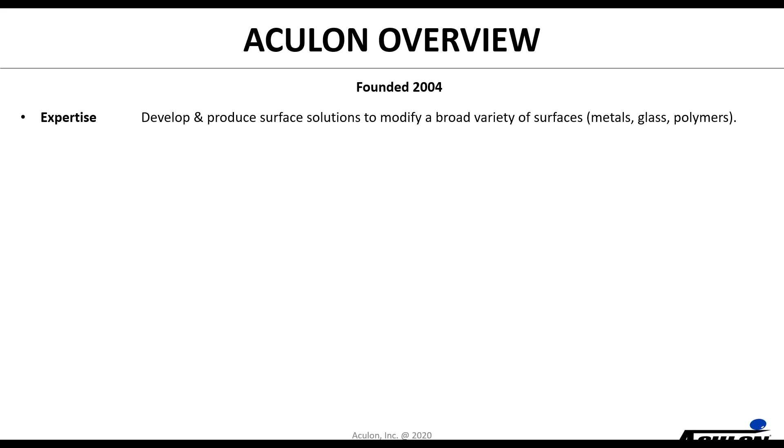We are a surface modification company working in a broad variety of fields: electronics, consumer products, medical devices, oil and gas applications. We were founded in 2004, and what we do is develop and produce solutions that modify a broad variety of surfaces - metals, glass, polymers - functionalizing those surfaces with different functionalities depending on what the customer is looking to do.

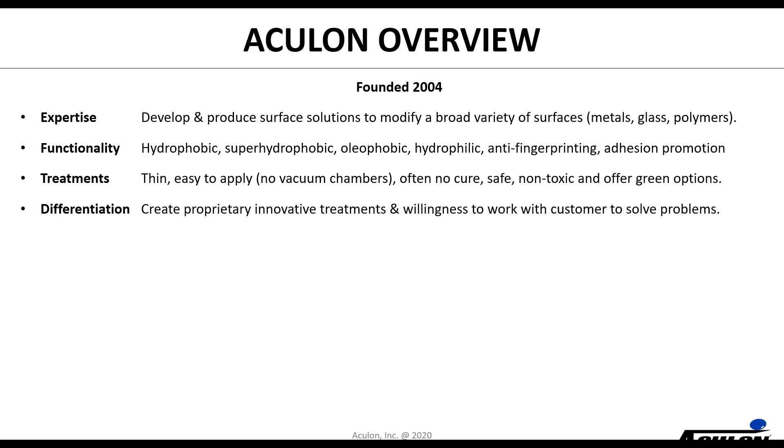Our treatments are all easy to apply. They're not done in vacuum deposition chambers, often no cure is required, they're safe, non-toxic, and we offer a number of green options. We differentiate ourselves from larger specialty chemical or coating companies by providing innovative treatments and working with customers to solve problems.

We have three divisions: electronics - we'll talk about one particular product in that today - oil and gas, and specialty markets including the medical area. Our business model is to produce chemistry; we do some treatment of parts, but we don't treat people's stencils except in a test methodology or testing environment. So in this case, we provide the chemistry to either stencil houses or directly to the users.

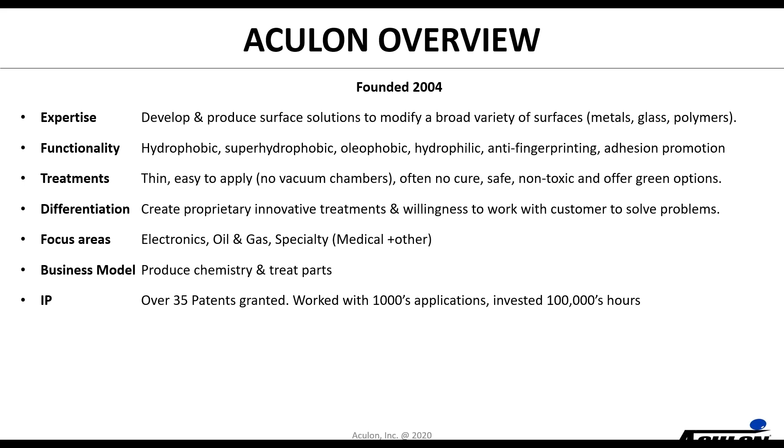We've got over 35 patents, worked on thousands of applications, invested hundreds of thousands of hours learning how to be experts in surface modification. We have over 100 products. Our people are smart - numerous chemists with PhDs, master's degrees, electrical engineers, mechanical engineers. We're based in San Diego, California, where we do our lab and development work as well as manufacturing, and we have offices around the world.

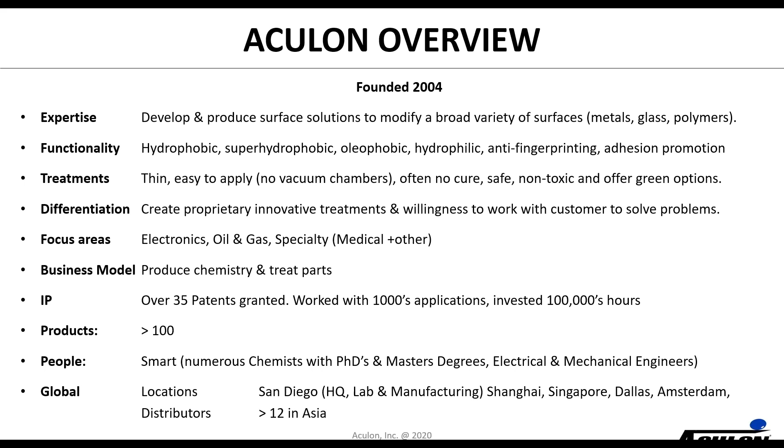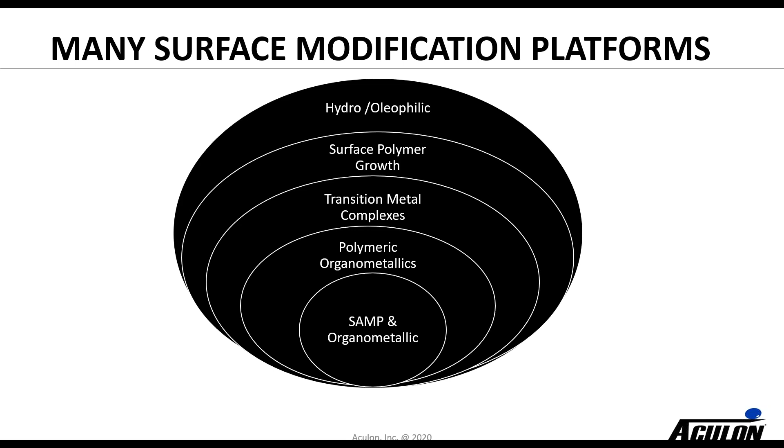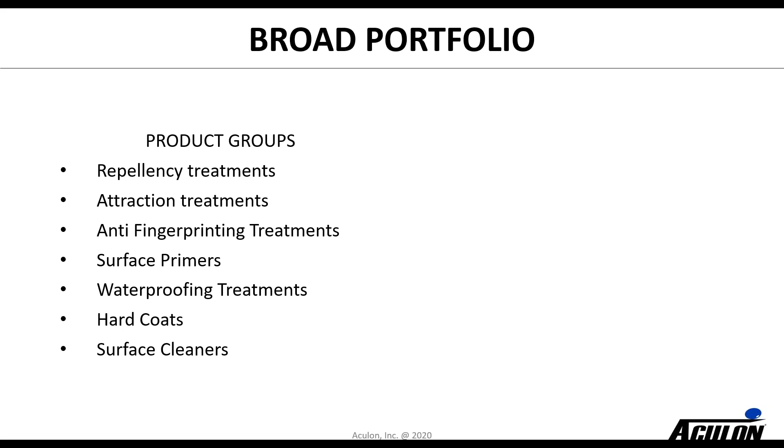As a company, we started using the technology we use on NanoClear stencils, which is a self-assembled monolayer with phosphonates, and we've built a series of additional technologies around that, giving us a broad suite of products used in a variety of industries, delivering a variety of functionalities.

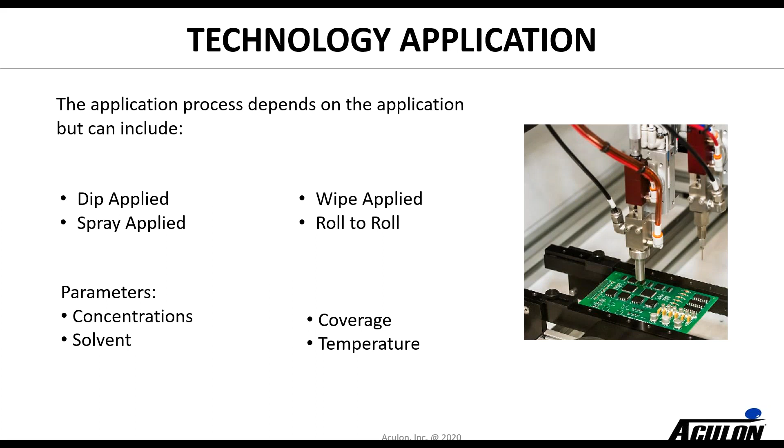From a technology standpoint, most of these are easy to apply. Some can be dipped or sprayed, or in the case of the stencil treatment, it's wiped on. We do roll-to-roll coating, and we can modify the parameters to optimize the treatment formulation. Everything we do relates to surface modification.

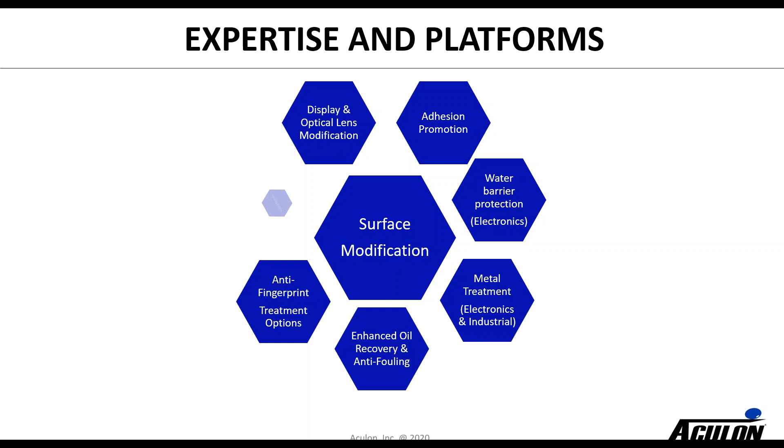We started as a nanoscale treatment company, and we've built a series of expertise and platforms into this marketplace. Today we're going to be talking about the metal treatment marketplace and electronics in particular.

As I say, we're organized by 3 businesses, and we have a number of things in the electronic space. NanoClear, which is our number 1 global stencil coating technology. NanoProof, where we treat a variety of printed circuit boards, provide moisture barriers and other benefits for keeping water away from circuitry. We have a business creating epoxy control, where we keep epoxy away from parts and components. It can be on semiconductor packaging, or it can be on lead frames. And then we do a lot in the anti-fingerprinting area, where we treat surfaces for laptops, tablets and smartphones, to reduce the visibility of fingerprints. And then we're doing some in semiconductor test pins.

So let's now talk about Stencil NanoCoatings. What are they? They're extremely thin, flux repellent films that are applied to the bottom side of the stencil and to the aperture walls. In doing so, you get an improvement in the quality of the print, better yields, better transfer effectiveness, and you boost the productivity of the line because you're spending less time under wiping. You'll see a dramatic improvement in the number of prints per cycle to each wipe. It's less downtime for paper changes as you're using less of that.

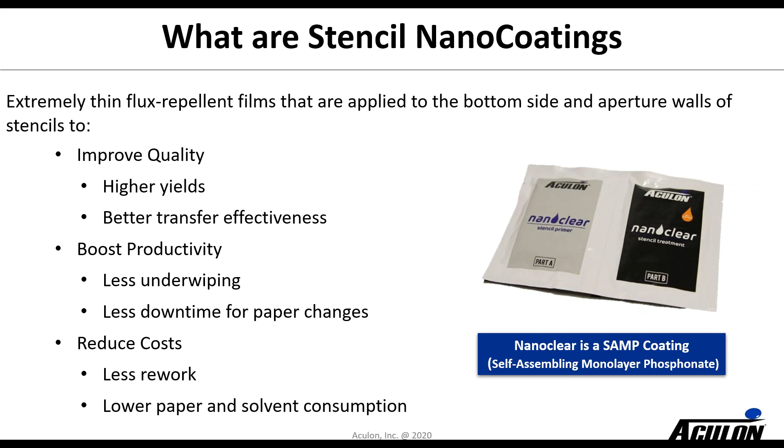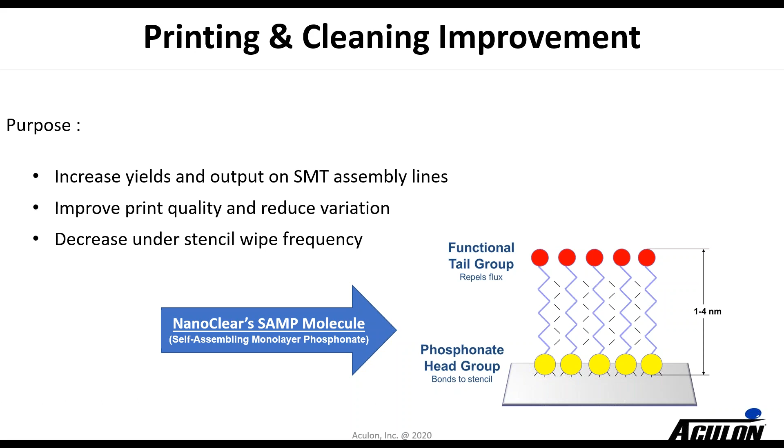As a result, you've got less rework and lower consumables, so you basically reduce the cost. What we do has been demonstrated to increase yields and output on SMT lines. It's a very straightforward technology that's cheap, works every time, and has been very reliable for us. We'll show you a couple of examples with QFNs.

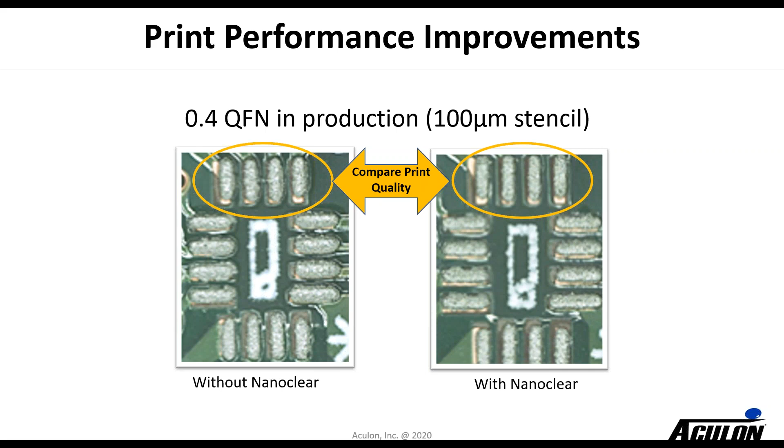Here's an example where on the left-hand side, you can see the QFN that hadn't had NanoClear applied to the stencil. You can see there's a little bit of slumping and connecting between the two deposits. Whereas on the right-hand side, where NanoClear was used, you've got nice crisp deposits. And obviously, that's what you're looking to do.

Here's another example from a 0.5 millimeter QFN. Again, on the right-hand side, you can see much crisper looking shapes and deposits. In this case, you'll see below that what we've done is extend the print cycle from basically 3 prints to now 5 prints, and that's a wet-dry wipe system. If you're doing the wet-dry vac wipe system, it went from 6 to 10 prints. So obviously, you're getting a significant amount of improvement in throughput because you've got less downtime and better quality in your printing process.

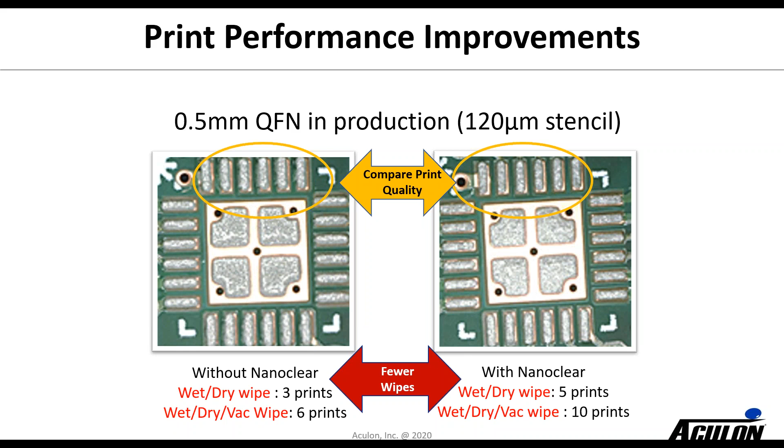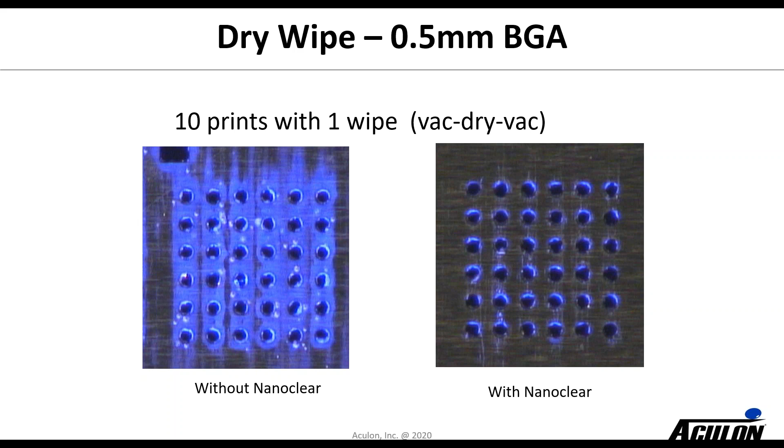To try to physically demonstrate what's going on, we added a UV tracer into the flux. You can see without NanoClear, it's being smeared around the bottom side of the stencil quite significantly, with a lot of it there. Whereas with NanoClear on the right-hand side, very little flux is getting transferred. So you're getting cleaner, better prints, and in this case, this was 10 prints to 1 wipe cycle. This technology has been in the marketplace for a number of years, and we've got many significant and sizable users out there that demonstrate and use it.

It's been well respected. It's won numerous awards, and it's had numerous cover stories written about it, and it's very efficient from a cost standpoint. Maybe Mario, if you'd like to walk us through this cost and savings payback calculator, that would be helpful.

Thank you, Edward. That was a great introduction. So we have on our website a simple calculator that you can use. It's downloadable, or you can work directly on our website. We'll include links and a downloadable file where you can enter in your exact information. Edward, if you can move to the next slide.

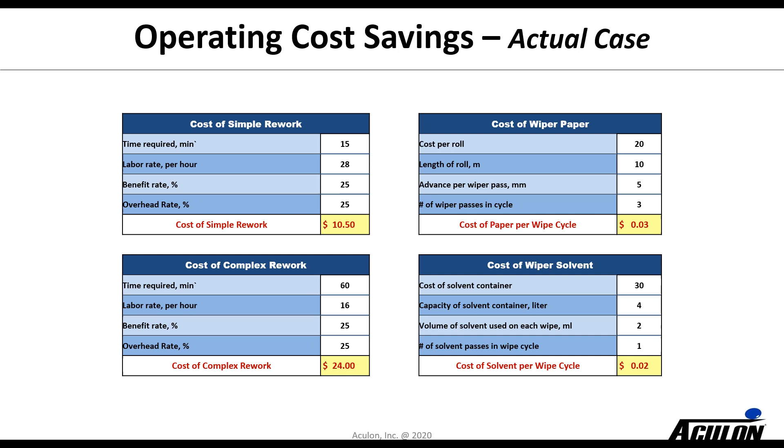There are sections where you can put in the cost of simple rework. You can insert your cost of wiper paper, the cost of complex rework, the cost of your wiper solvent. You can adjust all of these inputs, the costs, the usage, your labor rates, et cetera, and then put in estimations for changes after using the NanoClear, and it'll pop out what the changes, savings and improvements will be.

On this slide here, we have an actual case. This is from a customer that implemented NanoClear across their production line, and this is the calculator after they entered the before and after metrics. So these are not estimates, these are actual numbers.

So they calculated their improvement in defects, the improvement in wipe frequency, and the reduction in simple and complex rework. This gave them a set of information where they got back the payback after the number of prints to get payback on the cost of the NanoClear, which they determined was 43 prints, and the NanoClear had essentially paid for itself.

This gave them a number that at the end of the year from implementing NanoClear across their line, including the cost of purchasing the NanoClear, they saved $395,000, added 52 hours of additional uptime, and an additional 4,680 PCBs assembled per year. So that's real impressive, and this tool is available to you as well.

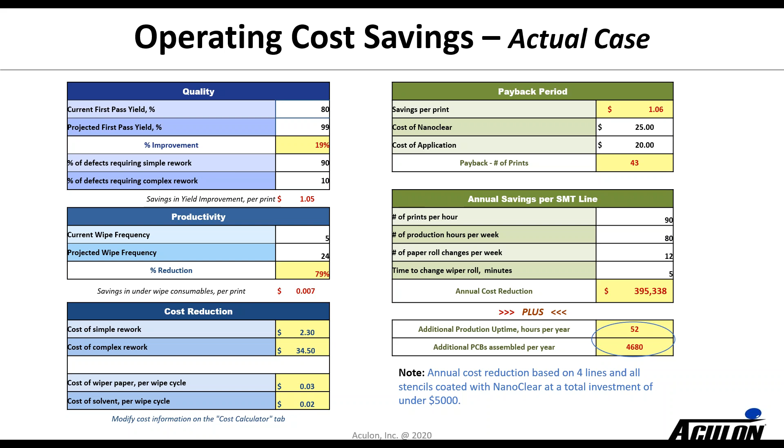So on to the next page.

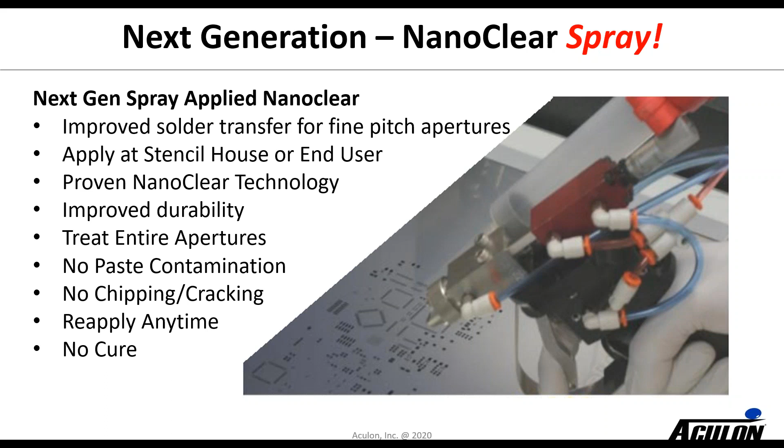You can even mix and match. You could take a NanoClear spray stencil and apply a NanoClear wipe after the fact if you needed to treat that stencil again.

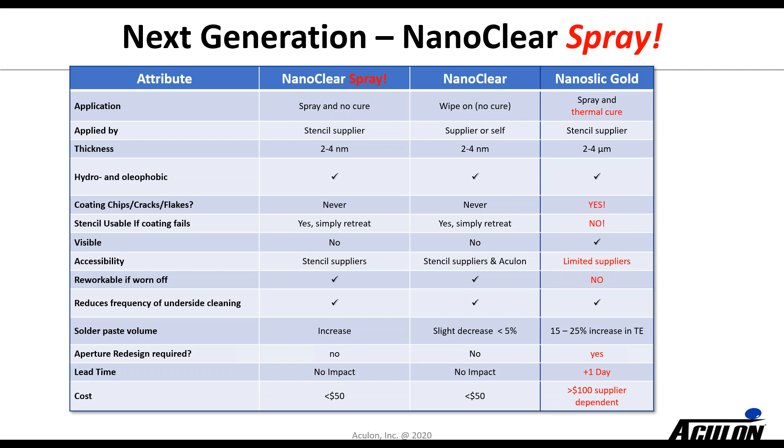So on to the next page, to detail some of the reasons why you would want to focus on utilizing NanoClear and consider staying away from some of the thicker competitive coatings. After a few years of experience with these thicker nano coatings for stencils, it's become pretty well apparent that they're not as durable as everyone thought they were initially. Most customers are seeing pretty significant cracking, chipping, and flaking of the thicker spray coatings.

And this is a problem for several reasons. Aside from the fact that it's not as durable as everyone thought, these coatings coming off can contaminate the paste. Once the stencil coating is damaged, they need to be discarded. In fact, the leading U.S. stencil houses have discontinued offering these because of the recurring issues.

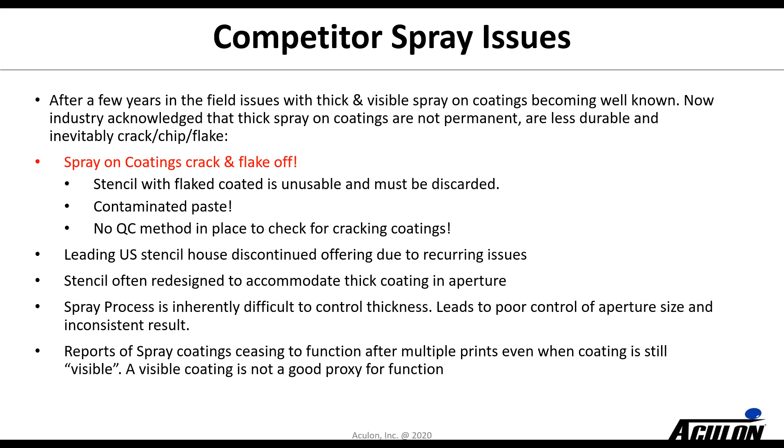So as mentioned in the previous slides, we are offering our own spray version for those of you that are concerned with these issues and are looking for a spray applied coating that mitigates these issues.

So to cover NanoClear's reliability and durability in these next two slides, both the wipe and spray variant of NanoClear are monolayer, so it will never crack, flake, or chip like you might see with a competitive coating. It will never contaminate the paste, and the stencils will never need to be discarded due to NanoClear. As long as the stencil is mechanically sound, you can recoat with NanoClear as many times as you need.

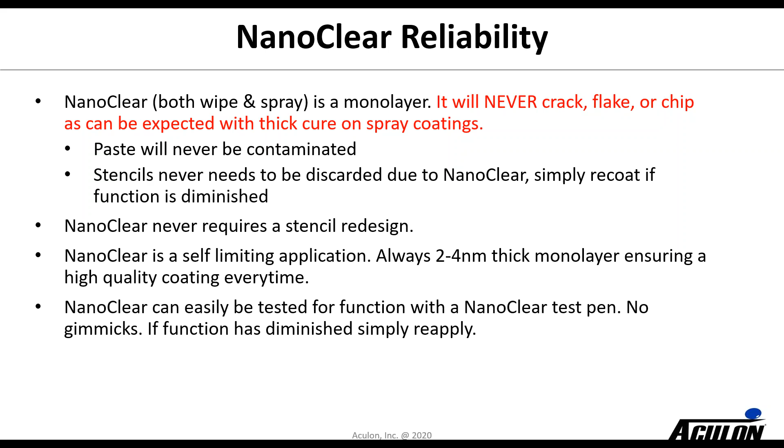NanoClear will never require a stencil redesign, and it's extremely reliable, both in the wipe and spray format. It is a self-limiting application, so it is always going to be a high quality 2 to 4 nanometer thick monolayer coating within the apertures. And if there's any concern over whether the stencil is properly coated, we sell a simple NanoClear test pen, which is simply a dye pen that can be wiped across the stencil in a matter of 2 seconds and is a very quick black and white test on whether it is coated.

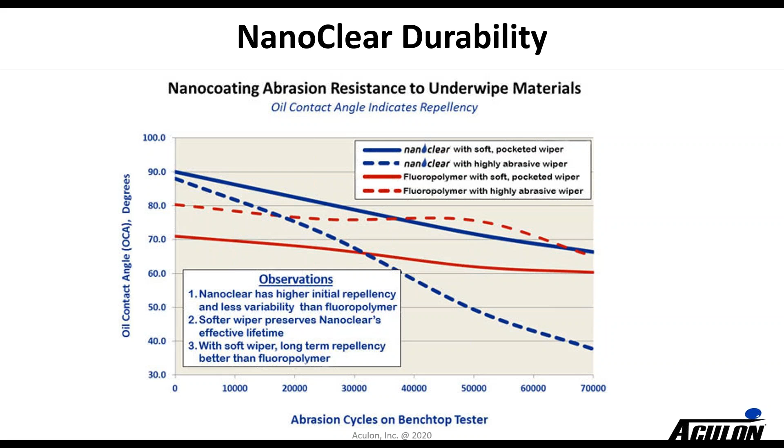Here we have some data on the durability of NanoClear, with information on some best practices for ensuring a long NanoClear coating. We do recommend that the right cleaners are used and that a soft pocketed wiper is utilized with NanoClear. As you can see from this data, if a soft pocketed wiper is utilized with NanoClear, it will outperform the competitive technologies for up to 70,000 prints. So we do recommend utilizing a soft pocketed wiper and non-caustic cleaners, and you can be assured that the NanoClear is going to last for an extremely long time.

To get into some of the details on the best practices, based on 8 years of production and multiple research projects, to cover what we talked about a moment ago, we do recommend a soft pocketed wiper, and some of those examples would be an Eco Roll or a Hyperclean wiper. Or you can reach out to us if you have a specific question about your wiper, and we can comment on whether it might be a concern or not.

We do recommend that a solvent wipe is utilized rather than a dry wipe for the long-term durability of the stencil. You should utilize a pH neutral cleaner or an organic based cleaner. We never recommend caustic cleaners, those are definitely a no-go. And you should take advantage of the fact that you need to clean your stencil less once it's been nano-coated. You'll find you're able to reduce the under stencil wipe frequency, which will not only increase your throughput, but also increase the lifetime of the coating on the stencil.

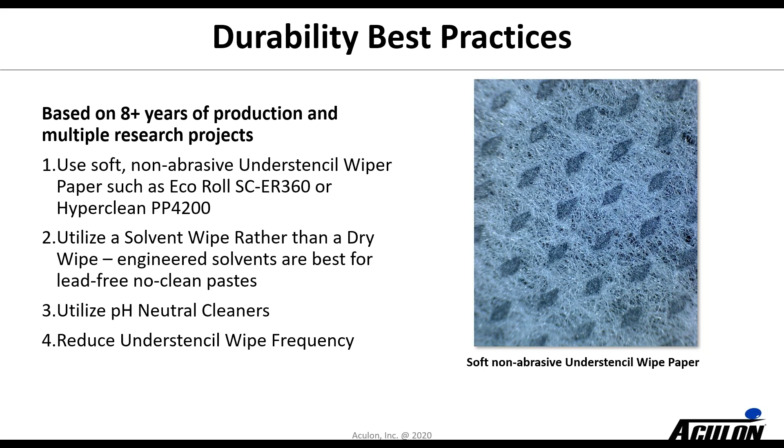Yeah, thanks, Mary. I like to tell people it's like you don't take your harsh scrubbing brush that you use on your cast iron cooking pan to your Teflon coated pan. You basically take a nice soft wiper on this Teflon pan. If you took a really abrasive piece of paper or harsh cleaning to that Teflon pan, you would damage it. So similar kind of thing. Obviously now you've changed the surface of the stencil such that you can use a softer paper, and you can use it much less frequently.

So that's good. NanoClear has been a good product. It's been number one in its category for a while. It's not just for fine pitch stencils. We kind of like to say it's easy, it's cheap, and it works every time. So if you're having any kind of printing dysfunction or whatever, I think this is a very simple thing to try.

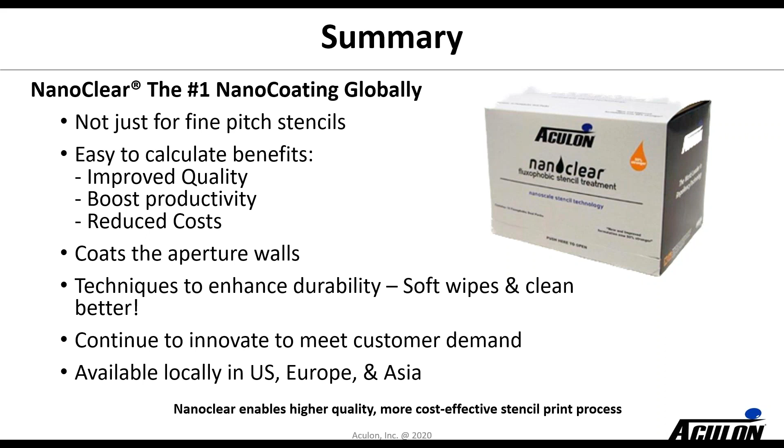We work with a number of paste companies, and they basically say, they often send out to companies that are having problems with paste, a box of NanoClear, and just say try this on the stencil and see if that solves the problem, and it does. It's kind of like the doctor giving someone a couple of Advil and saying, take this, go home, you'll feel better. So this solves most of the printing problems that are out there.

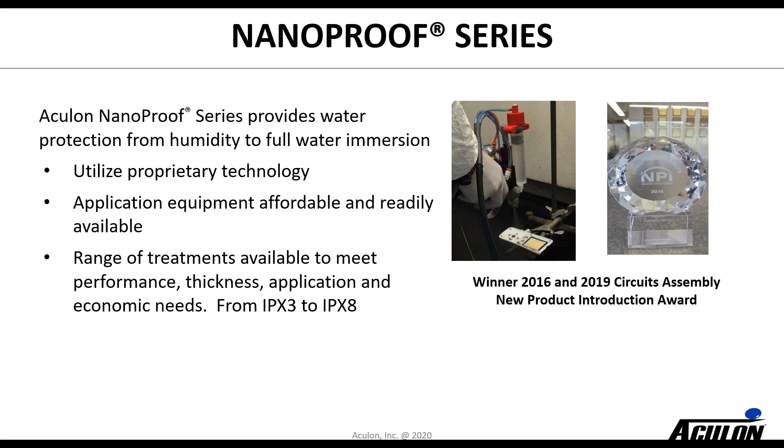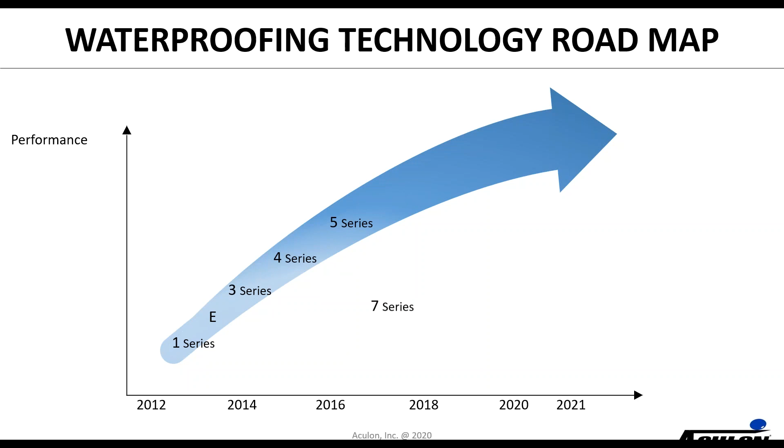So let me cover a couple of different things that may be of interest to you, because I know some of you engineers work on a wide variety of things. Our NanoProof series of products is designed to basically provide water protection from humidity to full immersion. It's been around for about 4 or 5 years with a number of products. We've actually, interestingly, as we've gone up the performance roadmap over the years, continued to improve basically the barrier type properties for that, and we've added some additional features.

We've added push-through connectivity, so if you need to connect to your board, you can push through the coatings. We've added flexibility, because obviously a lot more circuitry is becoming flexible and needs to bend 180 degrees. And we've added some green VOC exempt options to this as well. So we're providing a number of different things that could be useful.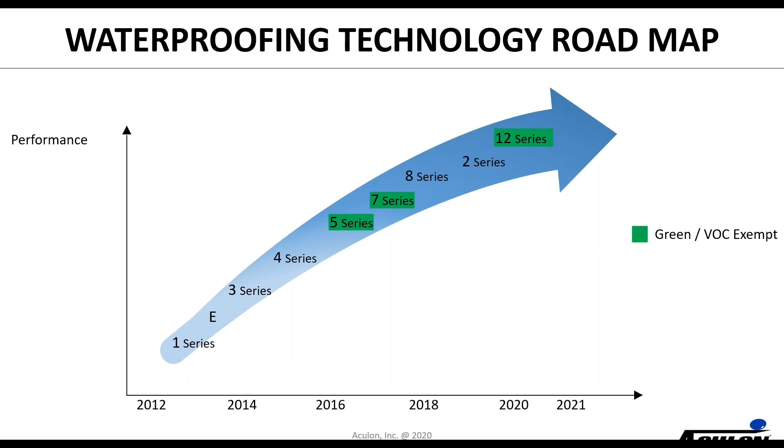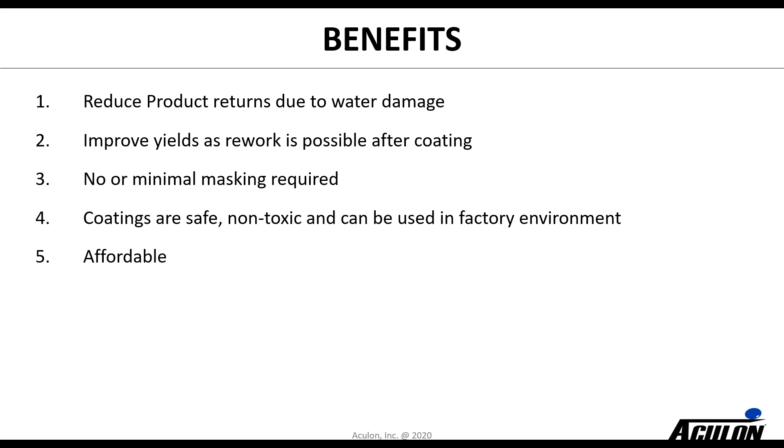Obviously, the goal here is reducing product returns because of water damage, and increasing yield because these treatments are able to be reworked after coating. They don't require masking. The coatings are safe, non-toxic, and again, they're affordable.

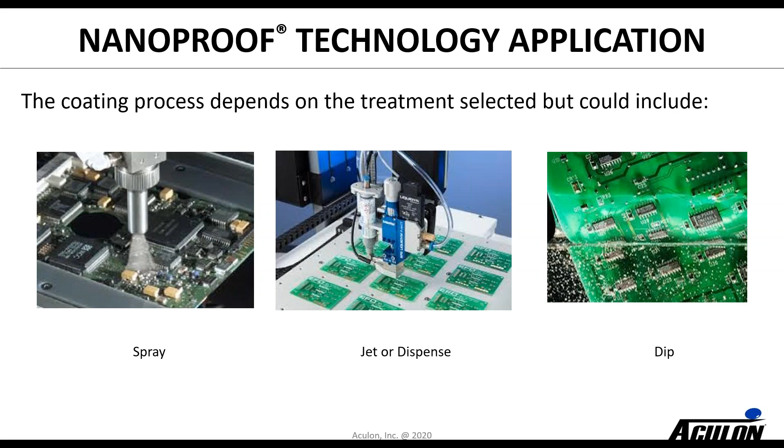The selection process depends a bit on the treatment you choose. We've got a variety of those, but we have options for spray, jet, or dispense, and even some dip. We've run a bunch of testing, and maybe Mario, you can just kind of explain this chart a little bit to everybody.

So what was done here was this IPX test. The board is coated and then inserted into salt water. It's powered up, and the current leakage is measured. You can see on the right side of the screen this is measuring the current leakage. As these are powered up and in water, the coated board is ticking along somewhere around 100 to 200 nanoamps.

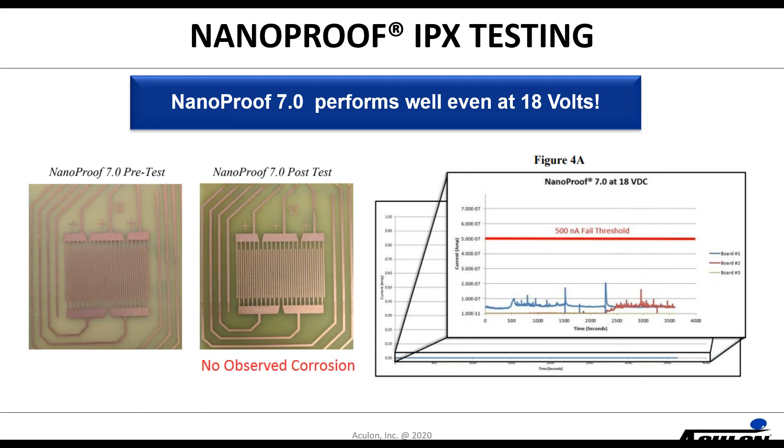Any spike above 500 nanoamps is considered a failure threshold, so these are well below it. They are not leaking current, and post-test the test comb is nice and clean copper. If it had failed, it would be totally oxidized, green, and bubbling. So it's a really good pass or fail test of these coatings.

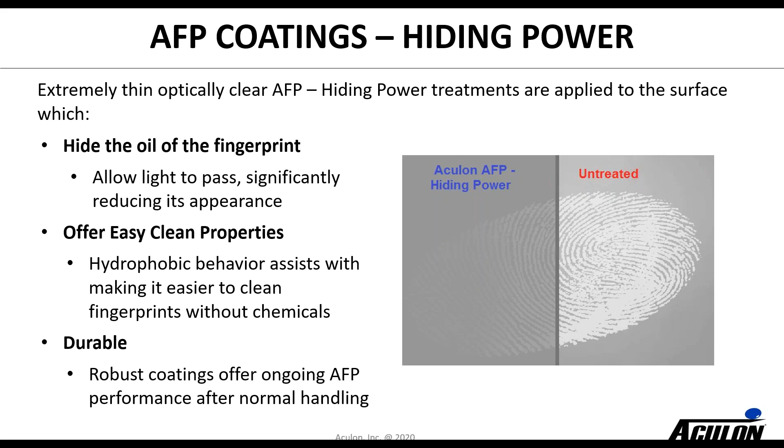We also do anti-fingerprint coatings. We've developed a range of technologies that allow you to hide the fingerprint, so you can see on the right-hand side an untreated surface versus one with Aculon AFP on it. These are also easy clean applications, so if you're looking at cases or appliances, it's a very good opportunity to do that.

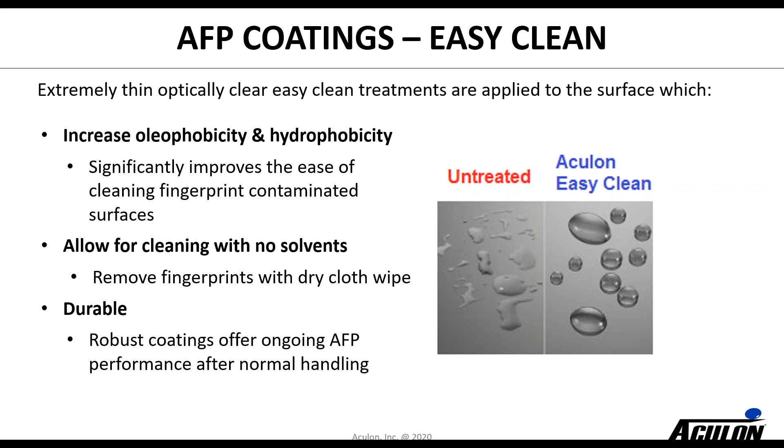We've also developed a range of sustainable treatments. A lot of our customers are looking for that, so we have VOC exempt options, we use PFOA-free products, and we're eco packaging friendly. A number of things to be good citizens here.

So in conclusion, Aculon is the number one nano coating globally. We're a platform technology company that makes customers' products better. We like to think we're surface solution experts. We've got a long history of working with customers to solve problems, and we've developed a broad range of capabilities, products, and IP relating to that.

So let me now turn to questions, and let me see if I can open this box up here.

Can any of your coatings protect the oxidation of a copper surface? Mario, you want to take that?

Yeah, so we definitely have coatings that can protect from oxidation of a copper surface. Which coating we select and the exposure conditions would dictate where we go from there, but we can certainly help. If you want to reach out or respond to the email I'm going to send after this webinar, I'm happy to talk to you about your application details, and we can figure out which of our treatments might be the right fit.